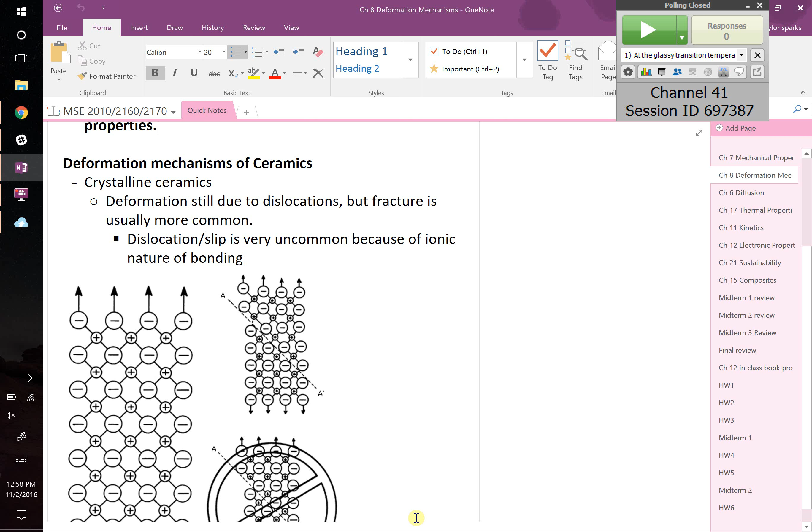A common response based on what we talked about already is, well, it has no twinning possible, or it has no slip dislocation, like slip systems. That's kind of the answer, but it's more complicated than that. It really comes down to the fact that you have anions and cations. So take a look at our system here.

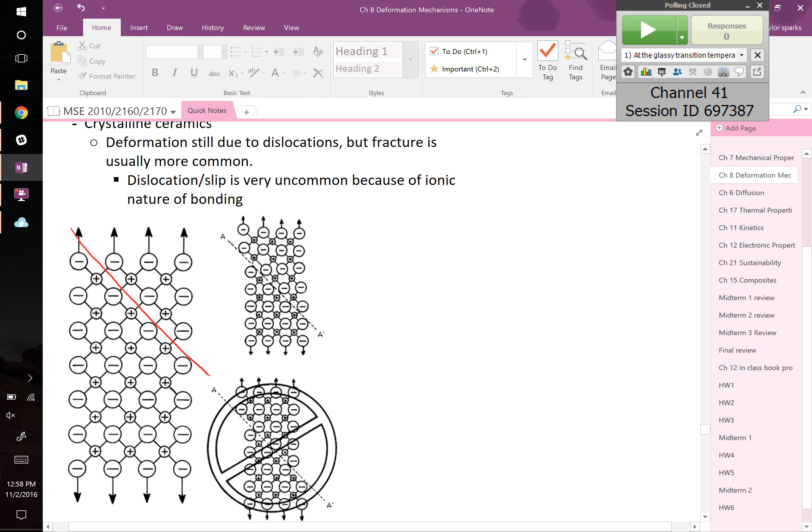Dislocation and slip are uncommon not because you don't have highly packed planes - you can have highly packed planes and highly packed directions. But the problem is, think what happens when you try and slide this past. Pick a plane, like in the drawing. If that happens to be our slip system, and let's say it's slipping this way, what will happen as you slide this half over a bond length - now this negative is going to be next to another negative, and this positive will be next to another positive. And that leads to really strong Coulombic repulsion.

So it has to overcome a very high energy to slide past one another. By the time this negative anion has gotten to that point, then it's back to normal. But getting there, you have to overcome a prohibitively high activation energy.

It's just not likely. You have to have a ton of thermal energy for that thing to slide past it without it just saying, it's cheaper in terms of energy for me to just break. Oftentimes, if you're at low temperatures like that chalk just was, I'm bending it, and instead of twinning or slip dislocations starting to move, it just breaks. It's not worthwhile to try and get that close to ions of the same charge. So it doesn't happen. It has to do with electrostatic repulsion as they slide past one another. Since metals are electrically neutral, you don't have that problem.

Covalent ceramics: slip is also uncommon, but here it's not because of electrostatic repulsion, it's because covalent bonds are so strong. To break that covalent bond, imagine diamond - a bunch of carbon bonded to carbon in a three-dimensional lattice. If you want to make that thing slip, you have to make carbon break a carbon bond, and that takes a lot of energy. At that point, it's more common for it to just fracture. They often do have complex structures because covalent bonding is directional, which leads to complex structures, meaning you don't have these nice, really high-density planes or directions to slip on.

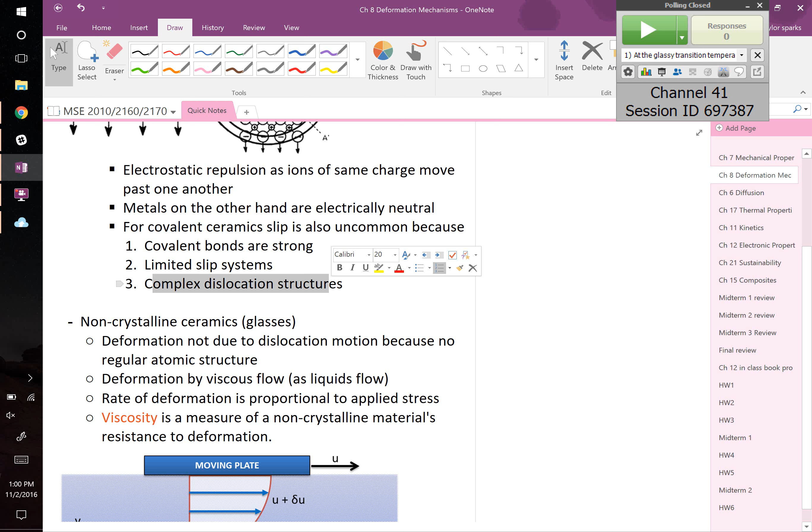What about glasses, non-crystalline ceramics? Deformation is still not likely in glasses, which are non-crystalline ceramics, but now it's because you don't have a regular atomic structure. You don't have a really nice plane, like in this row of students here. We said that I could have slip - I could take this couple rows here and slide them that way, and it's not a problem. But in the glass, you don't have nice regular rows. It's just a hodgepodge jumble of atoms that are sort of frozen in place, so you don't have slip systems, essentially.

Instead, how do we get deformation? You get it via viscous flow. Glass, if you heat it up, all of a sudden it becomes something that can flow really easily. My students that did a glass lab did that recently - they actually made their own glass. They got it good and hot, got all the bubbles out, and then cast it onto hot plates, and they literally poured it like you pour honey. It doesn't flow like water unless you get it super hot, but it flows - you can actually flow it.

So this rate of deformation is going to be proportional, for one thing, to the applied stress. If you're pouring it, that's just gravity pulling on it. But you could also put this in like an injection molder - you could apply a stress, and they do that. It's going to be proportional to that as well as the viscosity.

What's viscosity? You would have heard this term before if you've taken transport. Viscosity is a measure of how thick a liquid is. At some point, a liquid goes from something really thin like water, or water with soap in it, to really thick like honey, or even thicker like honey that's cold. That transformation from something that flows to something that doesn't flow as a fluid, we use viscosity to describe it. Literally how it's measured is you take a moving plate, drag it at some velocity. Let's say this is the surface of my liquid I'm testing. I drag it, and I know the velocity of the plate I'm dragging, but that velocity gradient occurs between the top plate and the bottom plate. So I had two plates, I'm moving the top one - the liquid touching the bottom plate's not moving, the one at the top is moving. So this gradient in velocity of the liquid that's moving is proportional to your viscosity.

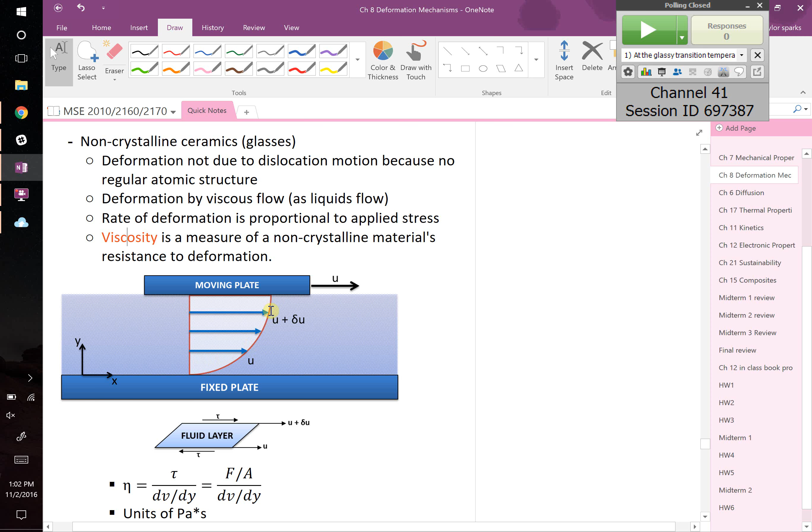Your viscosity is equal to the shear stress you apply divided by this gradient in velocity. Any questions on that? Sometimes that's hard for students to grasp. We're not going to say more about this or how it's measured in this class - when you take transport, mechanicals and materials, you'll learn way more about it, so I'm not going to say more.

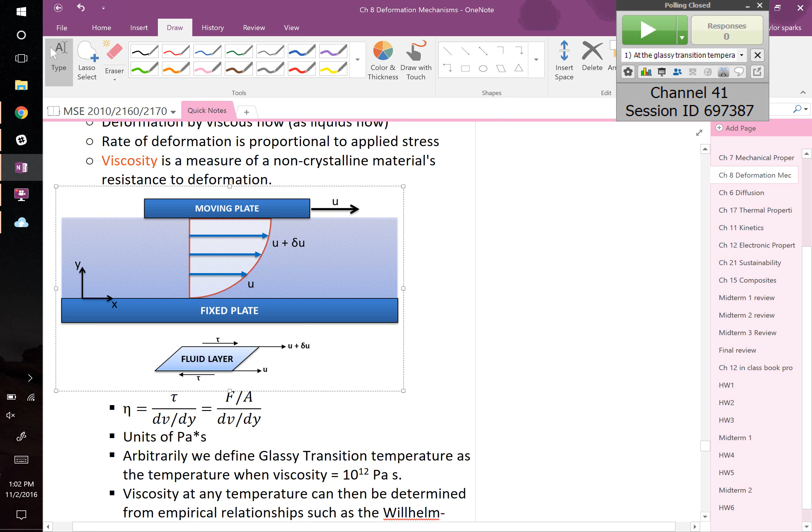Last chapter, we mentioned that the glass transition temperature is defined as the temperature at which your viscosity is equal to 10 to the 12th Pascal seconds. That was in last chapter - I double-checked the notes, we're just confirming that again here. That is a totally arbitrary definition. Totally arbitrary - they just picked it.

They said, at what point does a glass kind of start to move around a little bit? When the viscosity is around 10 to the 12th Pascal seconds. Totally arbitrary, but the whole community has accepted that.

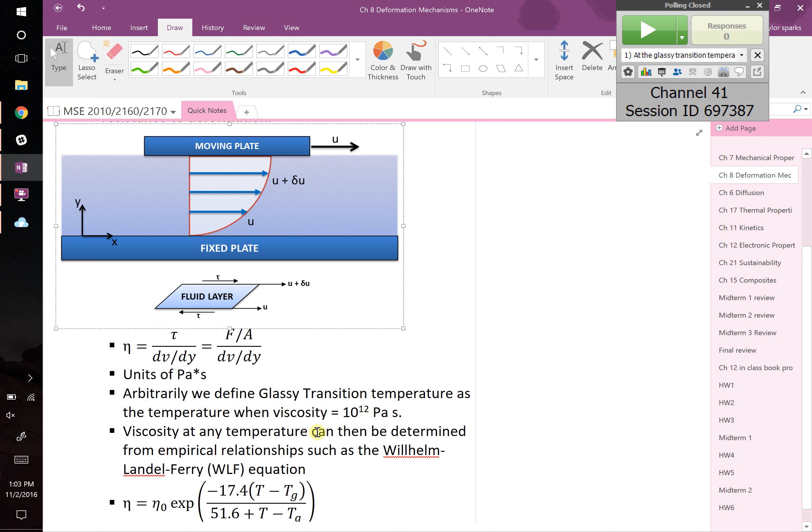That said, viscosity can be calculated at any temperature using a series of different expressions. In this class, the only one we're going to use is the WLF equation, Willhelm-Landel-Ferry, which says the following.

The viscosity at any arbitrary temperature is equal to the glassy transition viscosity, 10 to the 12th Pascal seconds, times exponential of negative 17.4 times the temperature that you're at minus the glassy transition temperature, divided by the quantity of 51.6 plus that temperature minus the glassy transition.

So these WLF constants, like this one and this one, those technically are constants for a given material. You'd have to look them up for a given material. These are general values that work for a lot of things, but if you want to be very specific, you have to know what those constants are for a system.

So if you buy motor oil, that might be something that's provided on like the spec sheet, what are those constants, so you know how the oil in my car is going to change when I start it and the oil's thick because it's cold, versus when it's running at some high temperature and now it's thinner.

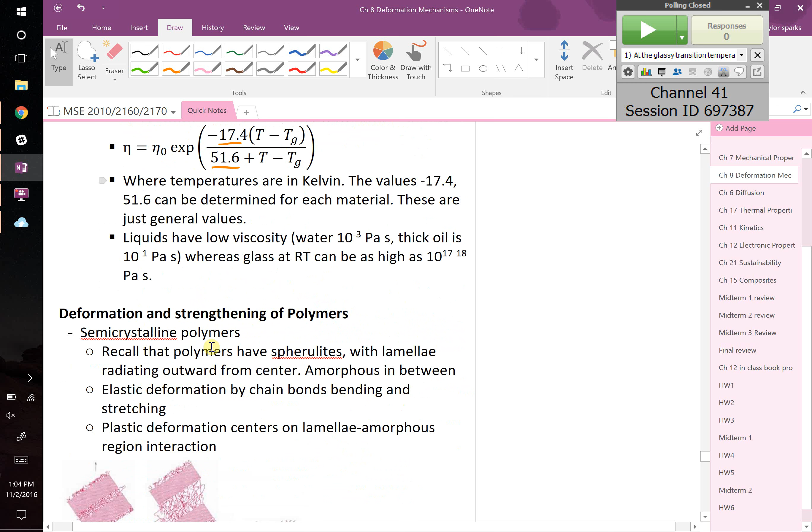Okay, let's talk about polymers. So that's really it, you really can't deform ceramics and glasses in other ways than that. Ceramics, if you want them to have slip dislocation, you've got to heat it way up, really high temperatures, before you get even nominal deformation. It's not going to be a lot, but it'll be some. And then in glasses, again, you've got to heat it up so it can flow. Very different than the slip and the twinning we talked about previously.

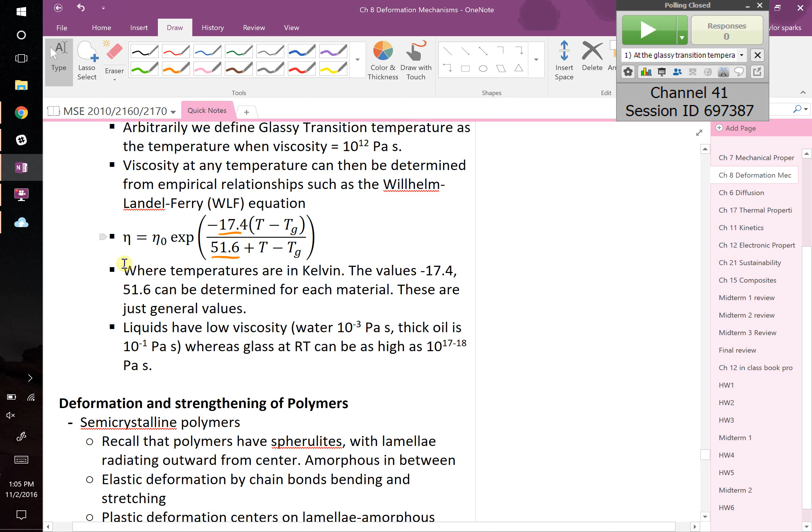So going back to the equation, is it a negative constant, or for like the negative 17.4, is that value negative? Good question. I've added the negative from the constant in there, so you could use this as is, the equation as it's written. That's a great question.

Okay, what about polymers, how do they deform? Very differently. So we're going to talk about crystalline versus semi-crystalline. First, let's talk about semi-crystalline polymers.

Semi-crystalline polymers, we talked about this a couple chapters ago when we talked about the structure of polymers. There's regions of the polymer that are kind of like this middle section of the row, where you've got folds of the polymer folding back on itself, and there's bonding between these layers. It's not super strong bonding, it's van der Waals, but it's bonding. Along the chain, that's where our strong bonding is.

But between these things, what do we call them? These were, again, called lamella - same word as lamella we used in phase diagrams, but a different meaning. But between these sections, you've got a region of something else, and then another section. So what happens in here is the chains are just random. So you've got blocks of organization separated by randomness. In that top left picture you can see a diagram of that.

So if you pull on this thing, particularly if you pull in a different direction than how these things are oriented - this middle row is oriented like that - if I grab this polymer and start pulling it this way at some odd direction, what's it going to do? How's it going to respond?

Well, it's going to do the easiest thing first, and the easiest thing is to stretch out the amorphous region. That amorphous region was already not very well bonded, so stretching and breaking those bonds, there's not many of them to break, so it's going to stretch first. Overall, you do get some elongation as you pull it up and down by doing that.

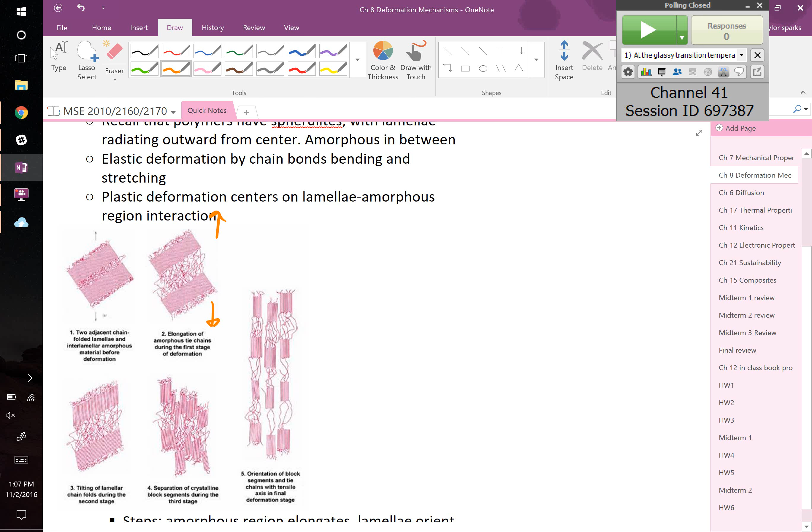Matt asks: so we kind of unravel the solid regions? Parts of the solid regions actually do get unraveled a little bit. These lamella, the ratio of lamella to amorphous would probably shift towards amorphous a little bit. I couldn't say how much, but that's the concept, at least conceptually what's going on here.

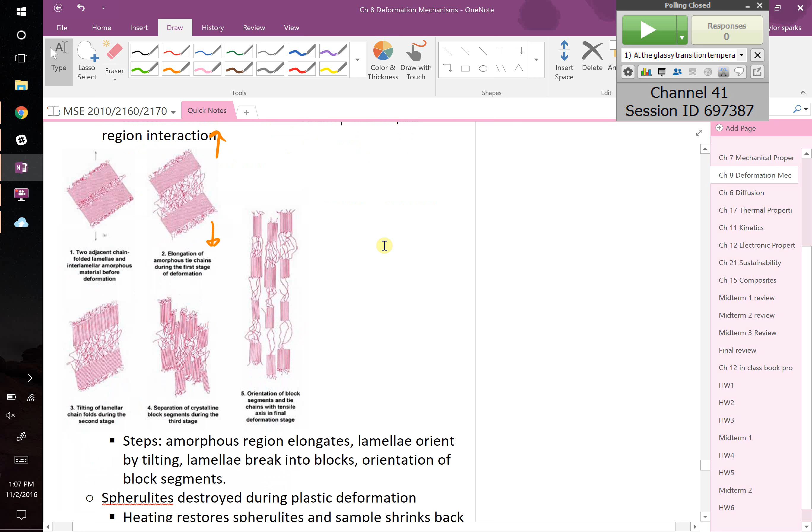So these are the steps, we've talked about them. Spherulites, which is the overall organization, were like the blocks of organization separated by amorphous regions, another block. It had this big region. Those get destroyed in this process. We went from something that was more ordered to something that is now stretched out, and we changed the order in it.

So, interestingly, when you heat these back up, you restore the spherulites, and the sample is going to shrink back, tending towards the shape it started at. Very different than metals. You took a metal and we cold or hot worked it and achieved deformation, but when you heat that back up, all you do is either get rid of dislocations via recovery, or at most you do recrystallization and grow new grains, but the deformation, like this object, is permanent. It stays put. Polymers, it's different.

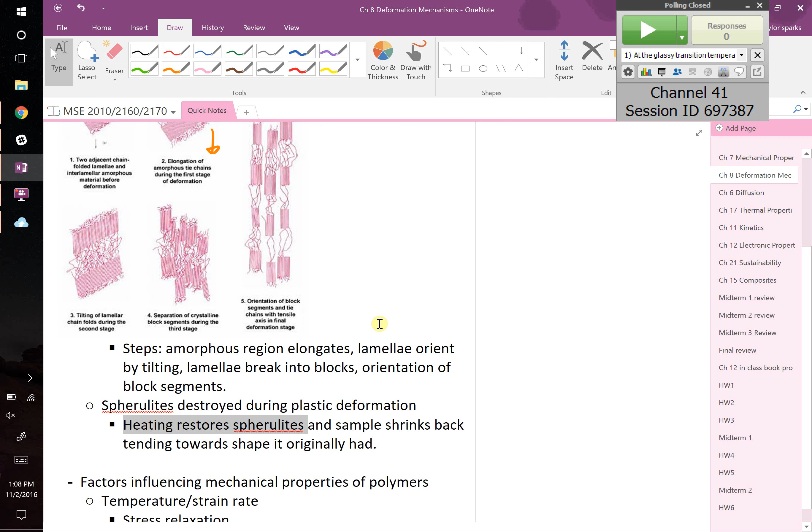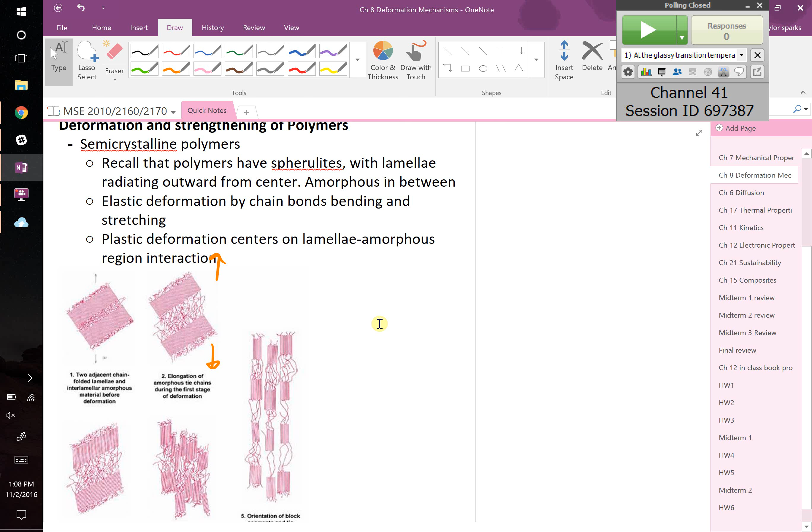When it's in this state, if I heat this up, I'm basically saying, here's some energy, lower your energy. Use that thermal energy to lower your system's energy. And it says, great, I can do that by bringing these together, by closing it up, basically by trying to get back to that state. So when you heat a polymer up after it's been drawn or something, it's going to shrink back to its original shape. It's going to tend to, because you're giving it thermal energy for it to go from a higher energy strained state back to something where it wants to be.

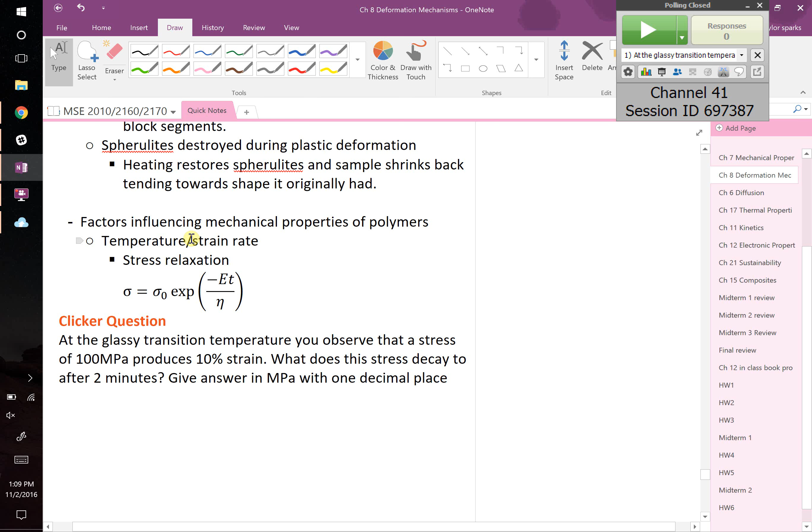So that's completely opposite of metals. Because polymers can do this, we already talked about stress relaxation. So I'm just going to remind you again, here's the formula. We'll see it at some point, we saw a variation on the homework this week, we'll see it again. If you load it up to an initial stress sigma naught, that's our initial stress. If you know what the modulus of your polymer is, how long it's going to be held there, and the viscosity of your polymer, you can calculate what the stress will relax to after a given time at some temperature. So that's our clicker question.

Let's start with that today, which says the following: At the Glassy transition temperature, you observe that a stress of 100 megapascals produces 10% strain. What does this stress decay to after 2 minutes? Give your answer in megapascals rounded to 1 decimal place. I'll remind you that at the Glassy transition temperature, by definition, this equals 10 to the 12th Pascal seconds. I'll also remind you that technically things inside of an exponential have to be unitless, so make sure your units cancel or you won't get the right answer on this. Your units have to cancel.

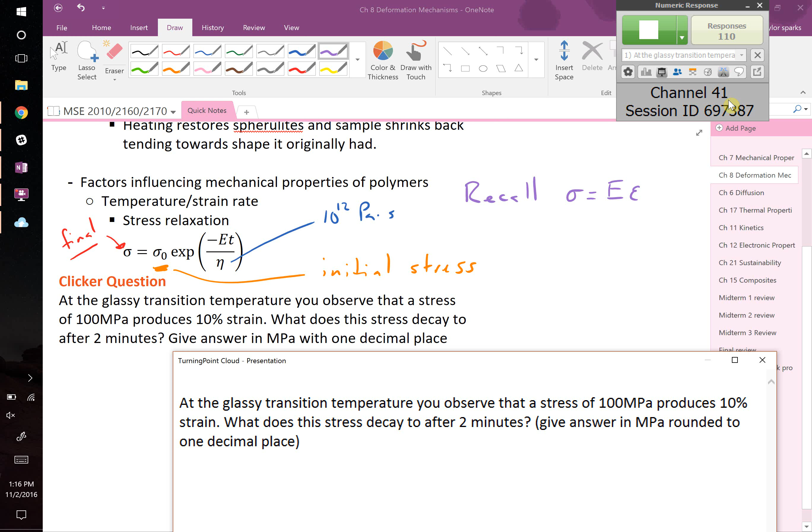Okay, we good? Just a second. Yep. What's happening? Why? Why does this pen always break?

Okay, going to close the poll. We good? We're good. Okay, what do people think? Great, majority of you guys, 3/4 of you get the right answer, 88.7.

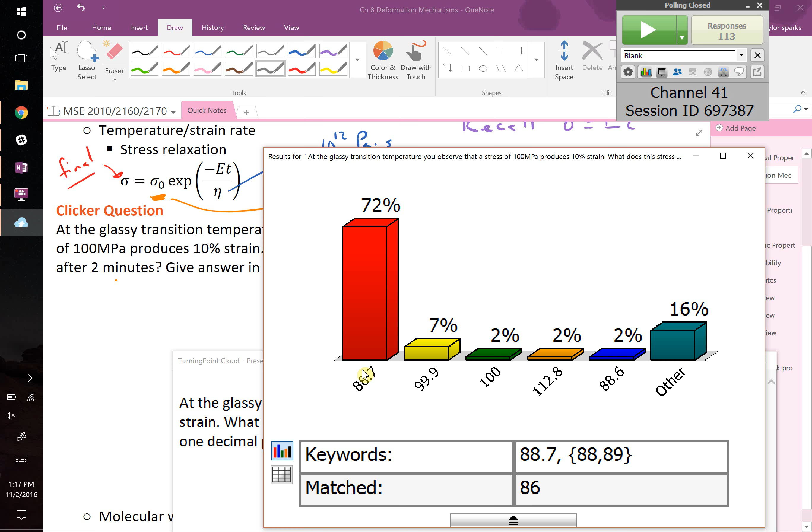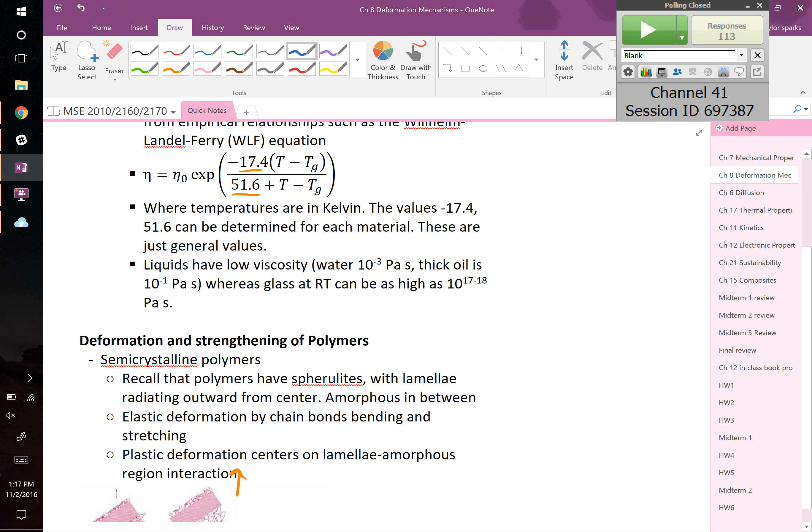So how do we get that? Where did it come from? If my pen's going to work, we can work it out. Why is this not working? Alright guys, bear with me, my pen stopped working, this is the worst thing ever. Alright, now I'm going to type it out, it'll be even easier just to type it. Just call it. Okay, so in this case, E equals the stress over strain, right?

Right? That's way too small to read. Let me fix that.

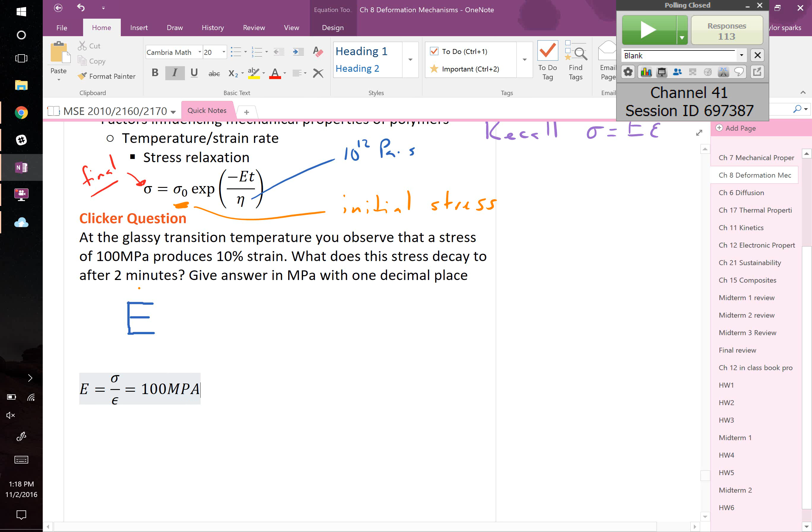Right, so that's equal to 100 megapascals over 0.1, which means our modulus is equal to 1,000 MPa. Okay, so now we've got our modulus.

So now we can just plug it directly into this equation. We can say that sigma, our stress, equals whatever our applied stress was, which was 100 megapascals, times exponential of negative 1,000 megapascals.

Let's convert megapascals into pascals so the units cancel. Right, so now it's pascals. And then we need this to be in seconds, so the seconds cancel. 2 minutes is 120 seconds, right? So this will be over 10 to the 12th Pascal seconds.

When you plug all this in, you get 88.7 megapascals. Megapascals, because this has no units and the megapascals carried over, right?

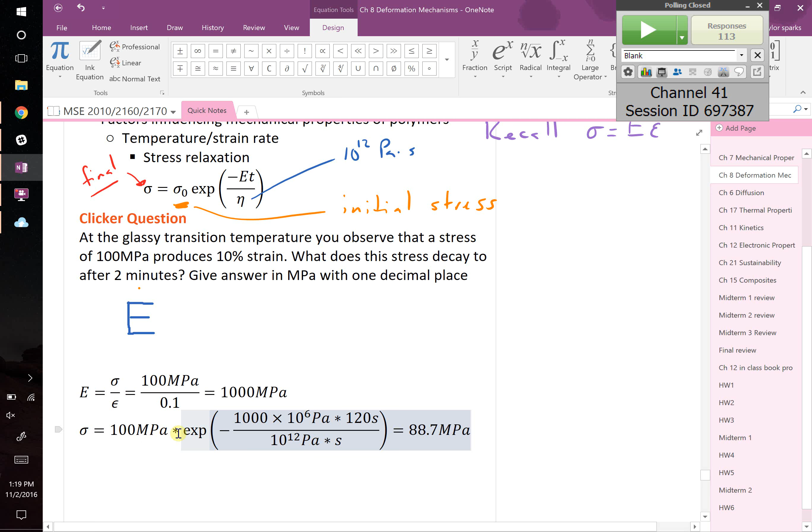Any questions on this? No? Okay, let's keep going. A few more things to say about this.

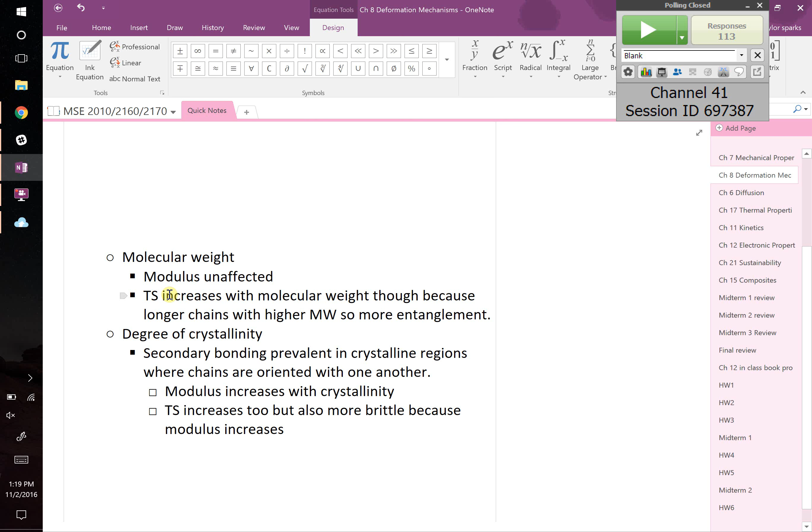Molecular weight: the modulus is unaffected by molecular weight generally, but the tensile strength increases with molecular weight, because higher molecular weight means longer chains. So the likelihood of this chain tangling up with another chain and pulling on it, pulling on the covalent bonds, increases.

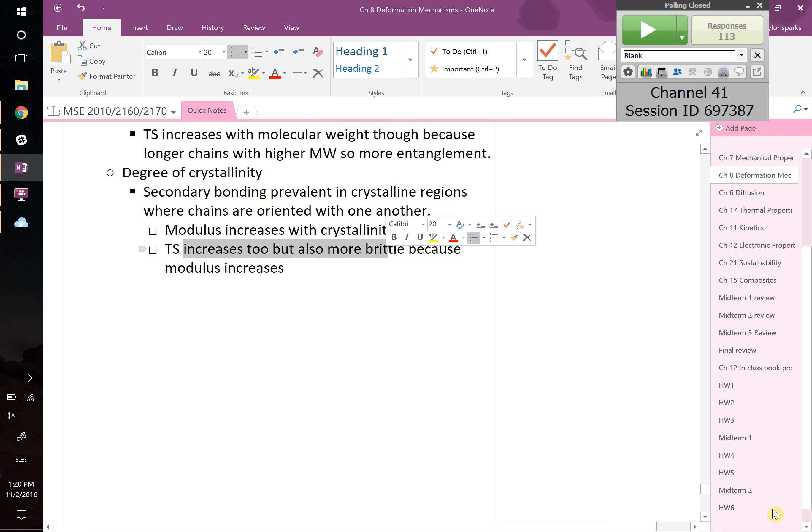So tensile strength goes up because of more entanglement. The degree of crystallinity: if you go from something less crystalline to more crystalline, you're going to change the bonding. Secondary bonding is prevalent in the crystalline regions, where there's good overlap. So if you increase crystallinity, you increase modulus and tensile strength, but it also becomes more brittle, because the amorphous regions are the ones able to flex more easily.

Pre-deformation by drawing is a common way we work with polymers, like how you get grocery bags - things that are polymers but really, really thin. They start out with a melt, and they make grocery bags by actually inflating them. It's a pretty interesting process - as you inflate it like a balloon, it gets thinner and thinner as you fill it up. That's how they get really nice thin things for a lot of polymers.

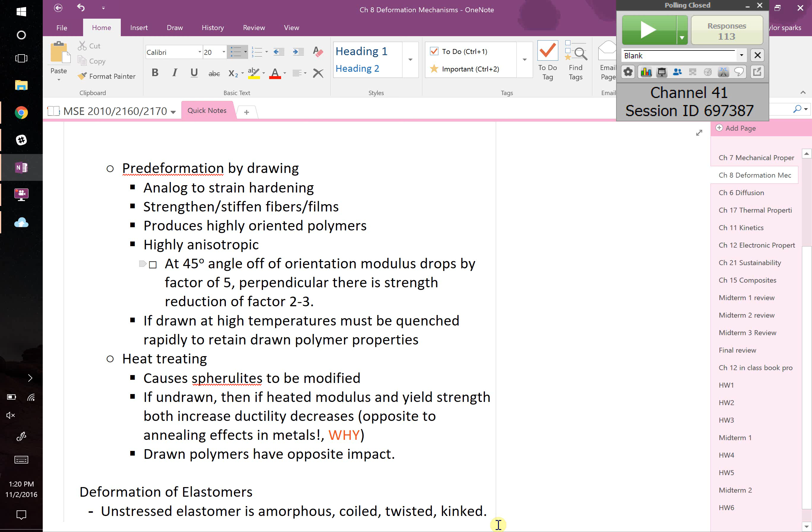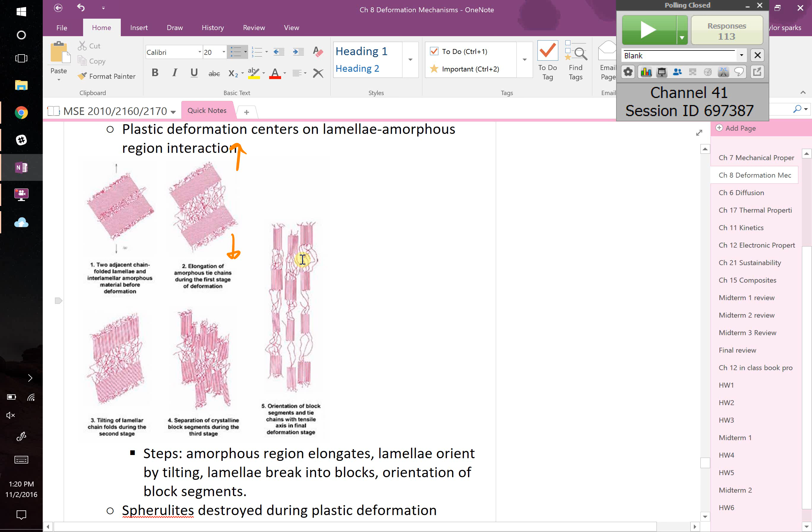So what happens to the strength? Well, you've lined up a bunch of these chains. Now when you pull on something, you're pulling on the polymers in the chain rather than just stretching the chains out. So it's going to be a lot stronger and less ductile as well. It's just like strain hardening.

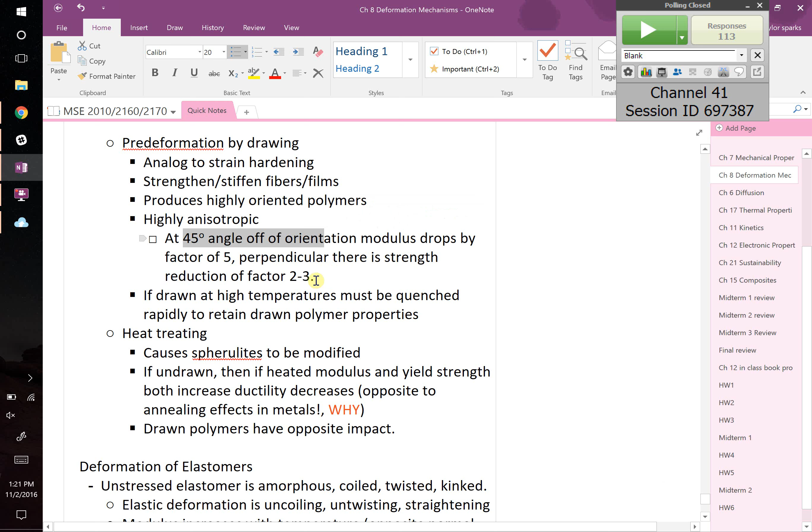It strengthens them and produces oriented polymers. These are anisotropic - if you draw a polymer this way, you'll have a lot of strength in that same direction, and transverse to that, a lot less strength. It can be pretty significant. If you take something oriented and pull perpendicular to that axis, you could see strength reduction by factors of 2 to 3 - a pretty huge drop in strength.

If you draw it at high temperatures, you have to quench it to retain those high temperature properties, because thermal energy says this polymer wants to shrink back down and go to a nice spherulite. So if you want to maintain these high temperature properties, you've got to quench it - cool it down and get rid of that thermal energy quickly so it keeps its high temperature structure.

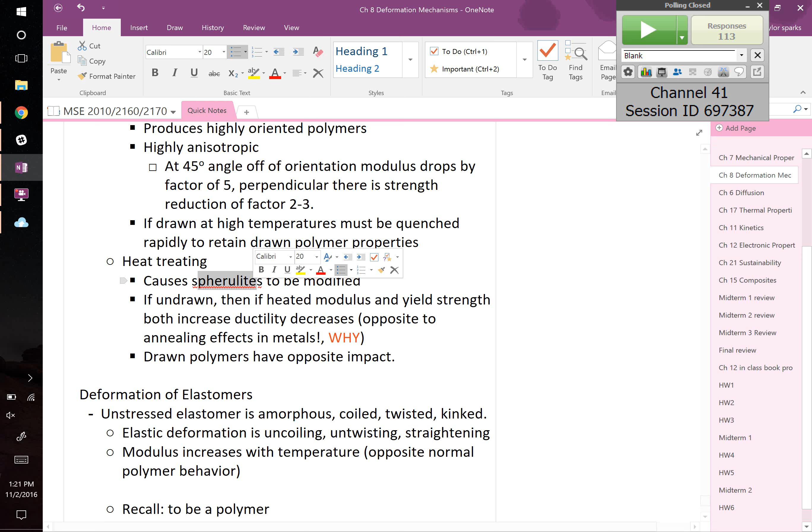And then, like I said before, if you perform heat treating, you're going to go back to the spherulites - back to how it was when it started. In doing so, you become more ductile and lose strength. This is the opposite effect of what happens in metals.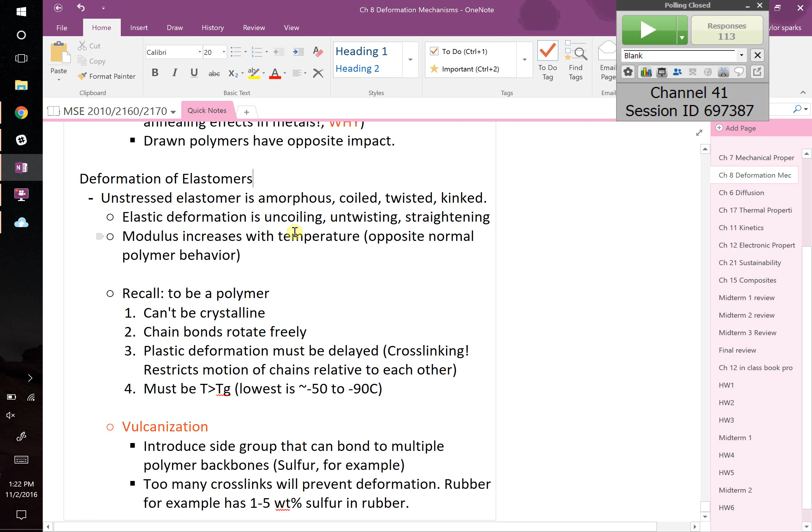Deformation of elastomers: elastomers are a lot like polymers, but now we add something - we say they're cross-linked. So instead of just van der Waals secondary bonds holding these things together, now you add a few really strong covalent bonds periodically by adding the vulcanization agent, like sulfur or something. So you get similar properties, but it has more to do with chains catching and entangling due to that cross-linking. And that's all I'm going to say about that.

So let's move on to Chapter 6. Chapter 6 is on diffusion. Here's our learning objectives - maybe my pen has decided to work again. It's back, remarkably. So the learning objectives for this chapter are: let's talk about the needs for diffusion in real engineering problems.

Is this just something that scientifically exists, or is there actually a need to understand this? Yeah, you betcha there is. We'll talk about how atomic motion and the equations that describe it can be used to govern diffusion. And if we have time, we'll talk about activation energy and the chemical potential gradient. I don't know if we'll get much further than that, so let's get started.

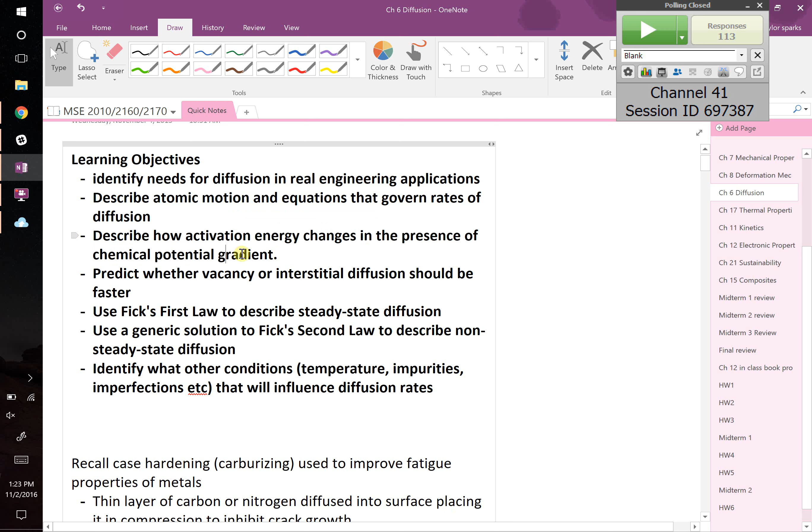So where do we use this? We use it all over the place. A couple chapters ago, we talked about case hardening. We said that if you want to strengthen a material, the surface is the best place to start. And they did something called shot peening.

What was shot peening again? What was accomplished by it? Matt: it puts a certain part in compression while the rest isn't. Yeah, we know that things usually break easier under tension rather than compression. And things start at the surface because the flaw size is half of what it would need to be on the inside, due to Griffith's fracture equation we talked about. So shot peening basically deforms the surface like crazy and puts it under compression. Therefore, to break under tension, it has to overcome the compression first.

So there's another way to do it. Shot peening is one way. Case hardening is another, sometimes called carburizing. And we do this in my own research group, actually.

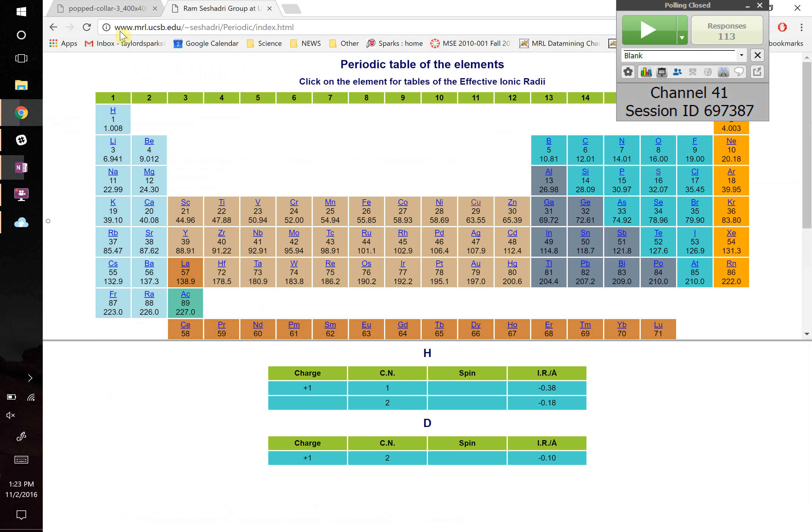Let me pull this up. Meeks, Shetty, Sparks, tantalum carbide - we just wrote a paper on this. I think I'll have it be part of the homework due next week.

Basically, we started out with a material that wasn't as hard, but it was really tough. So we wanted to make this thing both hard and tough. We want the surface to be hard so it can be used as a cutting tool, but a cutting tool does you no good if it fractures when you go to cut something. So we wanted it to be nice and tough, which the bulk already was, and we needed to introduce carbon from the outside into the material by carburization to make a functionally graded carbide. You'll learn more about that on the homework this week.

But they do this all the time, and they've known about it for a long time. If you have old antique guns, I think they call this patina - the collector's term for when a gun or artifact has that sort of tarnish on it. That tarnish is the function of diffusion of stuff going in there. It can also be oxidation. But in this case, they've intentionally taken a steel and put more carbon into it.

What do we know about carbon? Steel as a function of carbon content - which one's harder? More carbon, and why? Why did we decide that steel gets harder but less ductile with more and more carbon?

Is carbon interstitial? Yeah, let's imagine two scenarios: one under equilibrium, where the phase diagram reaches whatever the equilibrium is, and the other where you're just forcing something in and then you freeze it - you don't give it time to reach equilibrium. Under equilibrium conditions, the further you are towards the right where there's more carbon, the closer you are to the cementite phase. That's a ceramic. No surprise that it's harder and less ductile. On the left, you've got pure iron. So that's the first reason, under equilibrium.

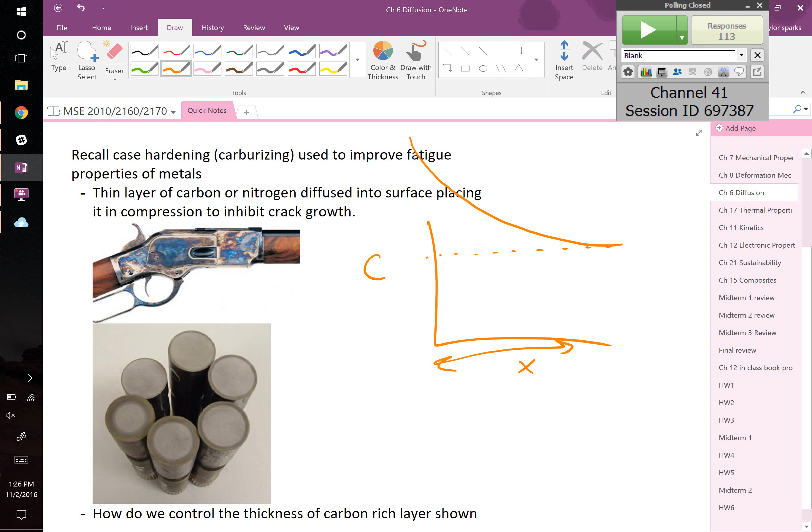And what does that do? Why would that strengthen something? Actually, this is a good question. So you had interstitials - this is our steel - and I take a bunch of extra carbon atoms and stuff them in here. Why did I make the material stronger and more scratch resistant?

Because we said deformation is scratching. Scratching is deformation. So for me to slide this row of atoms over and achieve deformation, I stuffed extra atoms in there that messed up our slip system. It made it harder for these things to slide past each other. It's starting to behave maybe a little bit more like a ceramic where there's more interactions that it didn't like. That's exactly what happens.

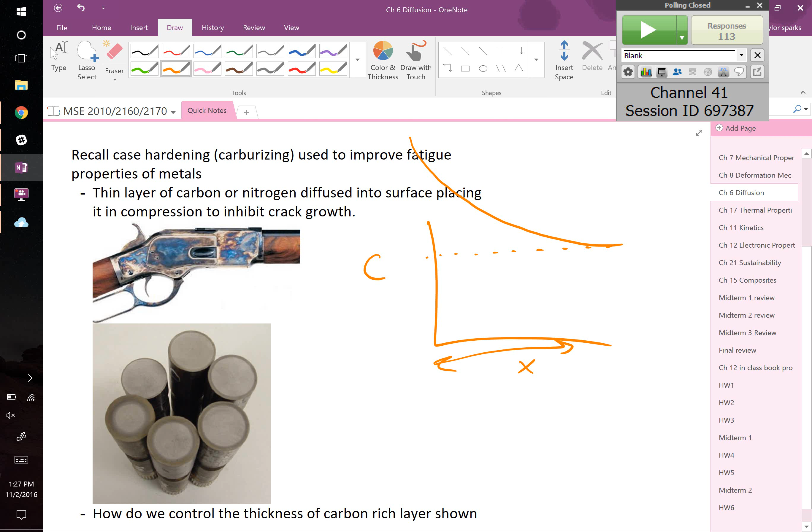Eric? So in addition to screwing up the slip systems, is it also because the bonds become pre-stressed? Yeah, absolutely. Another thing it does, not only blocking slip systems, but by adding extra atoms you're adding compressive strain. I'm stuffing too many things in here, it has to do something, so it creates compressive strain. So yeah, both of those are effective.

We've known about this for a long time, but for a long time they didn't know the science behind it. Now we can describe how this happens and we can control it. So if you take these 5 different materials, and if you want just a very thin surface carburization, you can achieve that. See the 2 different colors here? So you can have thin all the way up to really thick as you control 2 things. Two things dominate diffusion: time and temperature. Those are 2 independent variables you have. Another one we could say technically we have is species - some species will diffuse faster than others, but if there's a certain species you want to use, carbon in steel for example, you've got time and you've got temperature, basically, is what you've got.

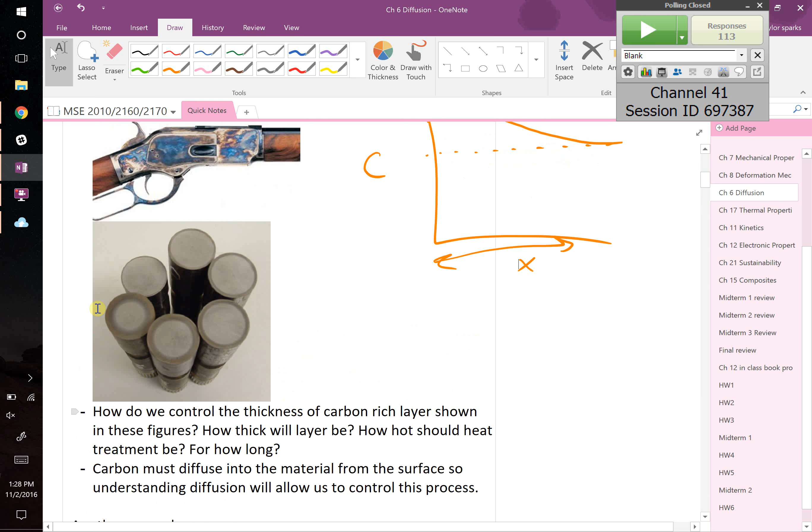The question then that we would like to be able to answer as engineers is: how long do I have to hold something? What temperature do I have to take it? And then how thick am I going to get? And when I say thick, is it all equal? What's my final thing going to look like? Is it going to look like that, or is it going to be a slope? What's it going to look like? How do we predict that? And how do we change that with different processing steps?

So before we say more, let's do a demo. I need somebody who feels brave, who's willing to risk life and limb for science. All right, come on up, Steve. You may regret this a little bit.

So we have here Axe body spray. You're going to smell a little bit like an 8th grader. But for science, you're doing it for science. What's going to happen when you smell the 8th grader in the room, I want you to raise your hand. You ready for this? Keep smelling. This is my favorite part of the job. Who smells it? All right, Rachel. Yep, the 8th grader spreading. Is this spreading? Oh, that's so strong. Are we probably good? Steve, you're a good man. Thanks for donating your life and limb for science. So, hands up if you smell it. What's happening? You're smelling it first here, and this is sort of like, oh gosh. I walked right through the wave.

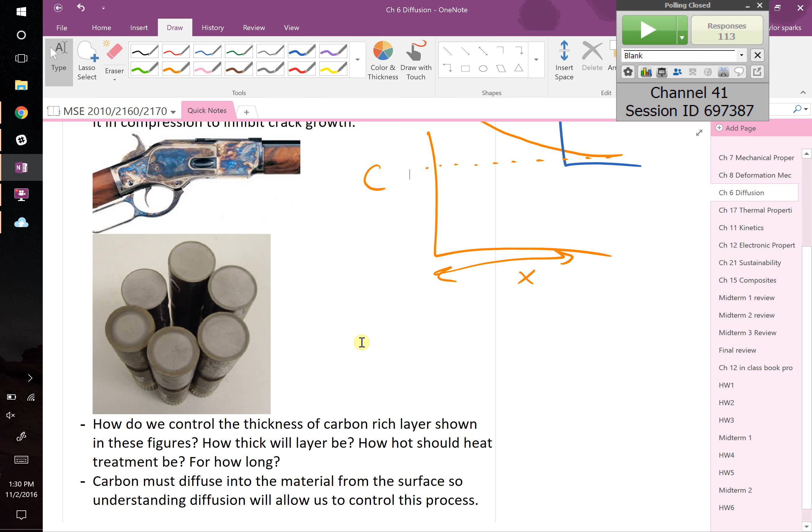So let's talk about it. Skip that, we'll come back to that next time.

Again, one more time: if you took copper and nickel, like my 2010 students are doing this week in lab, they take actual copper and actual nickel, put them together, and heat it up. After a while, we know that initially the composition gradient looks like this - copper goes 100% down to 0. But over time, it's going to flatten out and look something like that. This is actually a good graphic of what goes on. Think of atoms as always moving - so there they start out with your initial state. They're always moving, and the amount that they're moving is proportional to the thermal energy that you give them.

So they're going to sort of pinball around where their lowest energy sites are, and occasionally they get enough energy to hop. But they're going to generally spread out. Why? Because think, they're already here. So this guy can't hop that way because it was already occupied, but he could hop that way because it was unoccupied. So it has to do with atoms hopping and available sites. In the beginning, he could not hop up or to the left because those were both occupied, but he could hop to the right or down, and presumably in and out of the page as well.

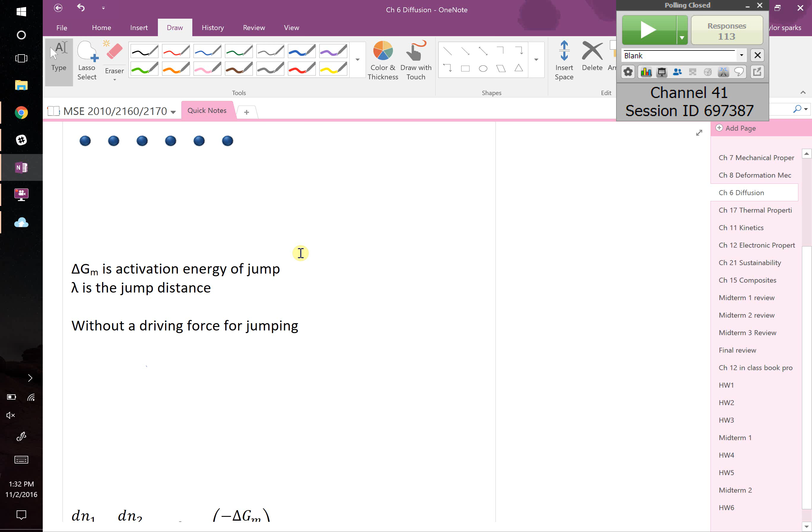So we can introduce some concepts. Let me grab my notes so I do this right. Okay, as this atom hops from this site to say that site...

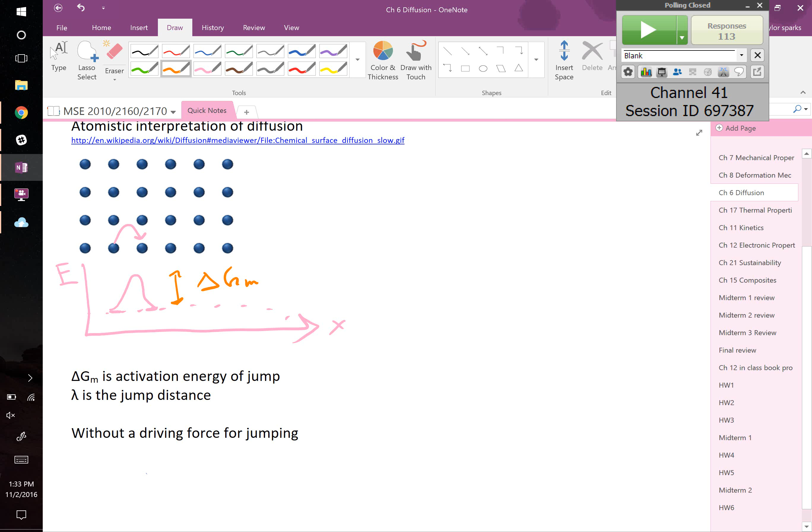We can draw an energy landscape here. Now, the initial energy state is low and the final one's low, but when it moves between those two states, it has to break bonds, it has to crowd nearby atoms, so it's actually going to produce a higher energy state temporarily. This right here, the distance between these two states, that is going to be our change in free energy during the jump. That's our activation energy. For diffusion to happen, it has to overcome the activation energy. You have to have at least that much thermal energy to get over that. And then the hopping distance, the jump distance, would obviously just be from here to here.

So if you have no driving force for jumping, we haven't added any driving force, then our plot might look something like this. We've got site number 1, and we've got site number 2, and they are both initially at the same energy. You have to go over some activation energy, and so what you're going to have is a flux of atoms leaving site 1 to go to site 2 as a function of time, dn1/dt. But you're also going to have a flux of atoms leaving site 2, dn2/dt. And if there's no driving force, if we haven't done anything to drive this thing and make it happen, then the flux of those two atoms going one way or the other is equal. Just as many atoms hop from site 1 to site 2 as hop from site 2 back to site 1. And again, this is still our activation energy.

So what does the x-axis represent? Distance. Yeah, so this is energy, and this is distance. Like somewhere in the crystal. Like, so if we said Rachel's seat to Ryan's seat, that's literally like a spatial separation of those. And when somebody hops from one site to another, there's an activation energy.

Now, we said that it's got to be unoccupied. So for Jimmy to diffuse, he can't diffuse this way by sitting on Ryan's seat because that seat's occupied. So if he wants to move that way, he has to step on Ryan's feet over here. That's uncomfortable, so it's possible, but it has an energy barrier. But if he goes this way, there's a nice empty seat, so diffusion that way would be desirable. We'll talk about where that comes in here in just a minute.

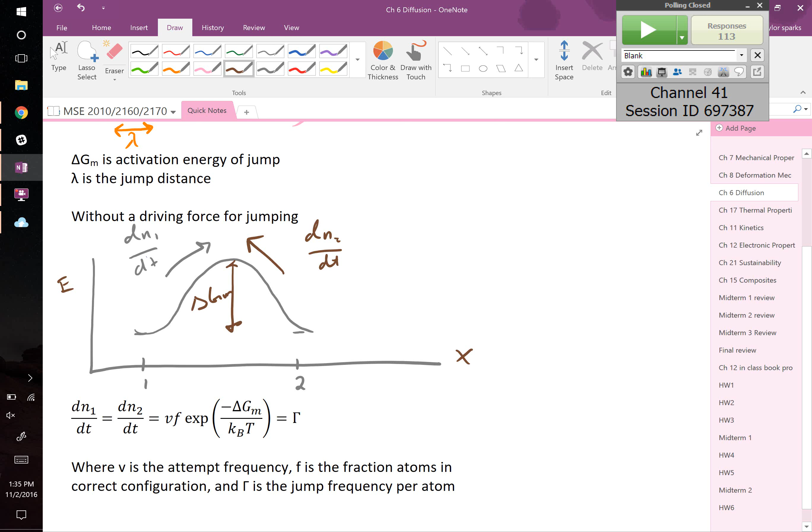Yeah, Eric? So if you're thinking of site 1 and 2 as specific points, how can they both be moving at the same time? This one wouldn't move that way because there's already one there, and so... I see what you're saying. We're going to imagine two scenarios. In one scenario, there's equal chemical potential both ways. In one case, this is empty and that's occupied, your flux would be whatever it would be related to your activation energy. And now imagine another scenario where this one's empty and this one's occupied, it'd be the same flux. Basically, all things equal, an atom doesn't care if it goes left or right. That's what we're saying, unless we bias it in some way and change the energy, which we're going to do in just a second. Everyone follow this? Any questions? We good? Okay, let's keep going.

So we can say that the flux of atoms leaving site 1 or leaving site 2 are going to be equal, and they're going to equal Vf times the exponential of an activation energy divided by a thermal energy. So what is V and F? V is our attempt frequency—literally, an atom vibrates, so the frequency of vibration. Every time that it goes whatever which way it's going, it's potentially making a jump.

Jimmy's shifting at maybe 1 shift per second, and that's his frequency. It doesn't mean it's a big shift, but he's shifting. F is the fraction of atoms in the correct configuration. For Jimmy to move from seat to seat, the fraction looks pretty good. He's got nothing up front, so we'll ignore that. He could go backwards because there's an empty seat, and he could go to my left because that's empty, but he could not go right. So 2 out of 3 would be his fraction.

Matthew can't shift at all, right? His fraction is 0, unless he goes into an interstitial site, but we're just talking about on sites for right now. So it has to do with not only how often you're shifting, but what's the fraction of sites around you, and obviously how much thermal energy you have. The energy required to actually make a move over is going to be proportional to how much thermal energy he has. If you only have this much thermal energy, you don't move, you don't get diffusion.

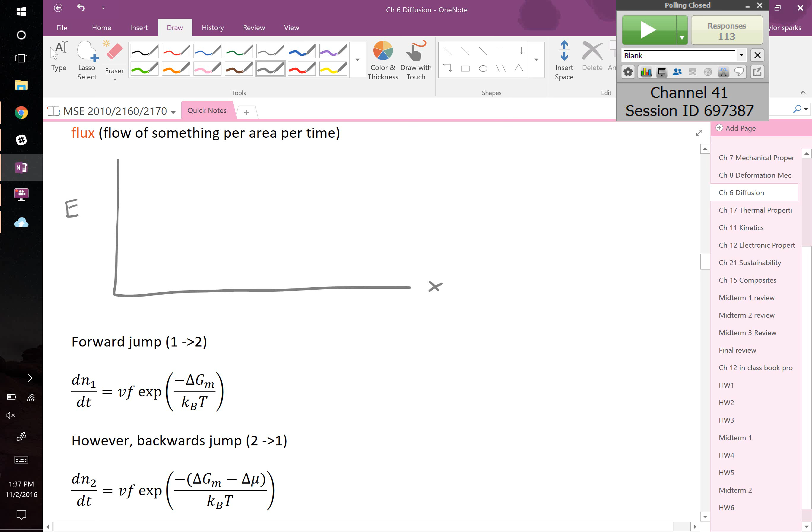Ben? I maybe missed it, just what the K sub B is. Oh yeah, great question. K sub B is the Boltzmann constant, and T is temperature, so Boltzmann constant times temperature gives you units of energy. When we write RT or KBT, we're in both cases talking about thermal energy, but KBT is thermal energy per atom, and RT is thermal energy per mole of substance. Since in diffusion we're talking about individual atoms moving, it makes sense to use the thermal energy for an individual atom, KBT. Great question though.

Okay, so now if we add a chemical potential gradient driving force, we can bias our flux. So we're going to change our picture here. Let's say our starting energy is up here, but our ending energy is down here. We're still going to have an activation energy, let's say it's still roughly the same.

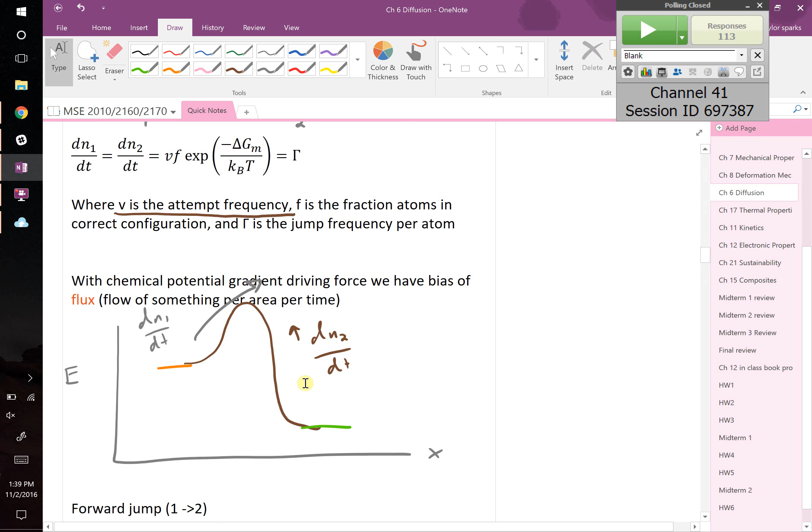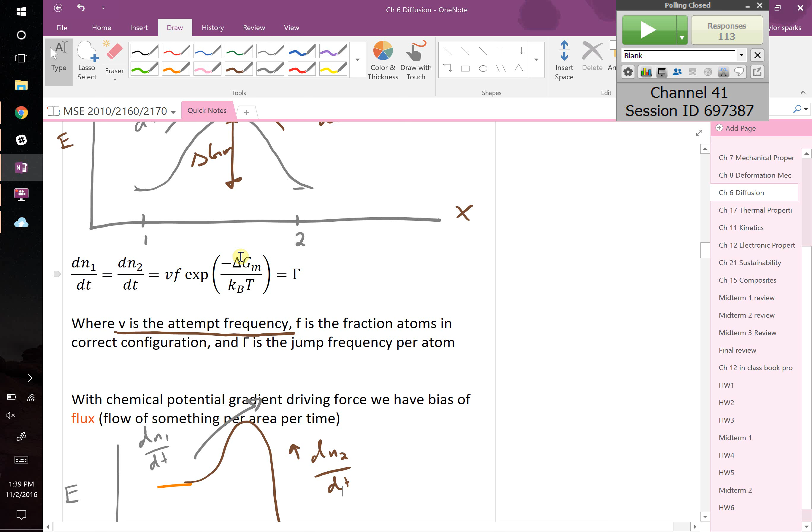But now imagine your flux, let me pick the same colors as before. So gray, our flux this way is dN1/dt, and our flux the other way, dN2, that's brown. So dN1 is going to be far greater than dN2. Think of it this way: dN1 still has a relatively small activation energy, at least comparable to what it was before. But now if you're going this way, your activation energy doubled, and that's a double inside of an exponential function. This is where your activation energy is, so if you double the activation energy, you dramatically reduce the flux going from 2 back to 1.

Any questions on this? Nothing, Ben? So like with the first one, you had just one activation energy. With this one, you have two separate. Yeah, let me draw it out, so let's draw it.

This distance right here in terms of energy, that's still going to be our delta GM. But meanwhile, on the other side, we have this difference in energy, which we're going to write as the change in the chemical potential. Chemical potential, I'll remind you what that was in just a moment. That will be equal to our gradient in chemical potential times the separation between the two sites. What was chemical potential again?

Chemical potential, by definition, is the change in energy of a system as you add or remove a component of a certain type. You guys are all different types of atoms. If I remove one atom of Jimmy from this body of students, what happens to the energy? Does it go up or down? If I add another Jimmy here, what happens to the energy of that body? That's the chemical potential.

So now imagine the scenario we started with. We sprayed good Steve up here with the axe, so the concentration of atoms here is super high. That has a different chemical potential than students in the back of the room who don't have any of the axe body spray. So there is a gradient in chemical potential going from here to the back of the room, more or less linear, kind of radial since it came from a point. Because of that, it may be linear or not, depending on how your concentration looks, but you get a difference in chemical potential. That's what matters—you get higher on one side than the other.

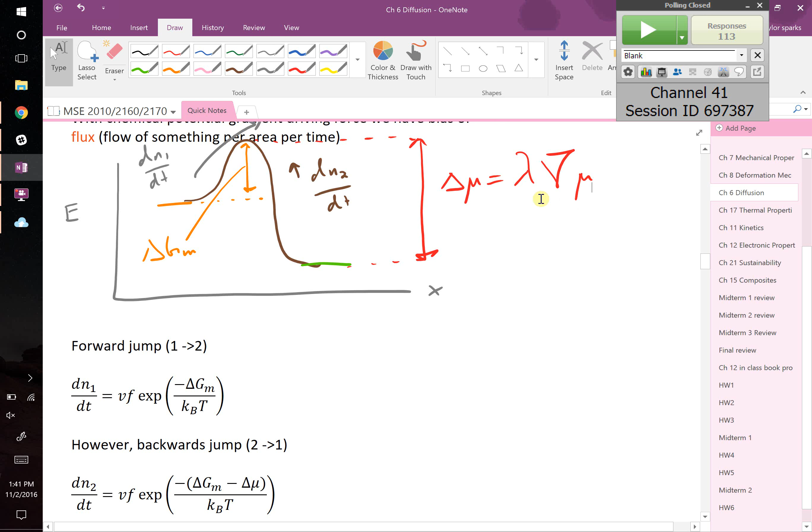Okay? Any questions? Yeah, Teek? Can you explain more what dN1 dt represents?

Great question. N is the number of atoms at site 1. T is time. So dN1 dt is the derivative of the number of atoms at site 1 with respect to time—it's the change in atoms as a function of time. Like in 1 second, how many atoms leave site 1? 1, 10, 100? Depends on the rate at which they're leaving, and obviously the rate at which they're coming into it again too.

Kylie? So that's saying, because there can only be one atom inside one at a time, that's saying basically how fast they're cycling through site one? That's one way to think of it, yeah. Obviously if you keep on moving atoms out of it, they'd have to keep coming from somewhere.

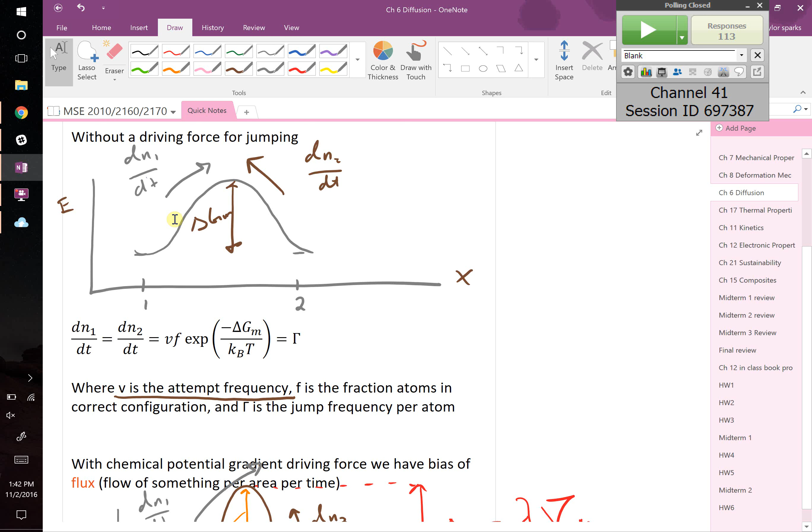But yeah, so then with your driving force—okay, can you explain again the difference between like if dN1 or dN2 is lower? Okay, so all we've done is by adding a chemical potential gradient, meaning there's a difference in concentration that will produce a chemical potential gradient, we make one energy state lower than the other.

Maybe the way to think of it is like, imagine I had a bunch of extra people, and I say we've got to put them in this row somewhere. All of you extra 20 people sit in these front couple rows. They're going to cram in here, which makes this front couple of rows uncomfortable, energetically unfavorable. So those extra rows of people are going to slowly, awkwardly try to shift further back, because it's lower energy—there's less stress, there's empty seats further back. That's exactly what's happening. You have higher energy here because I crammed extra atoms here.

And then there will be a time at which like dN1 dt and dN2 dt are equal, like an equilibrium point, where like... Exactly, that's a perfect question. Like, when will diffusion stop? When the chemical potential doesn't exist anymore.